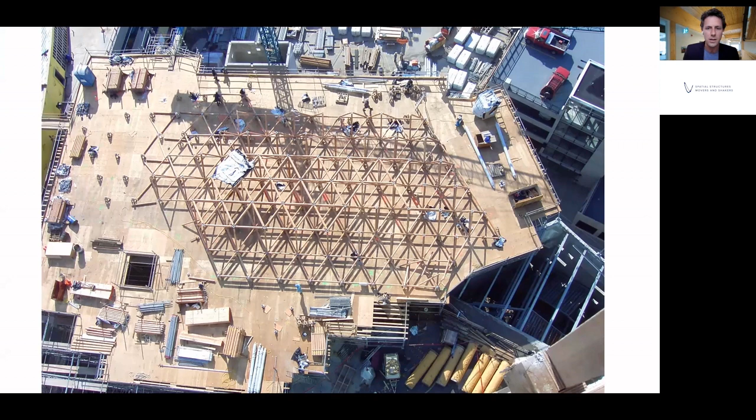And just to give you a window into some of the innovations that Jerry, my father, did, he worked on this really interesting space truss, type of spatial structure. This was one of the first timber spatial structures of its type back in the late 90s, early 2000s. And this is a highly innovative structure, kind of a free form in plan, but a flat spatial truss structure, tetrahedral truss structure, which uses what we call peeler cores.

Peeler cores is what's left after you take a big log and you peel it down into veneers, which are used to make plywood and LVL and the like. And once you get to the very center of the log, which is the young juvenile part of the log, that's typically a very weak, unpredictable material, and it's either turned into fence posts or landfill material.

And this really interesting spatial structure was based on the concept of using those peeler cores as structural elements, and actually doing a full series of structural testing on the peeler cores to determine their capacities and be able to use them, even though they're a highly unpredictable material.

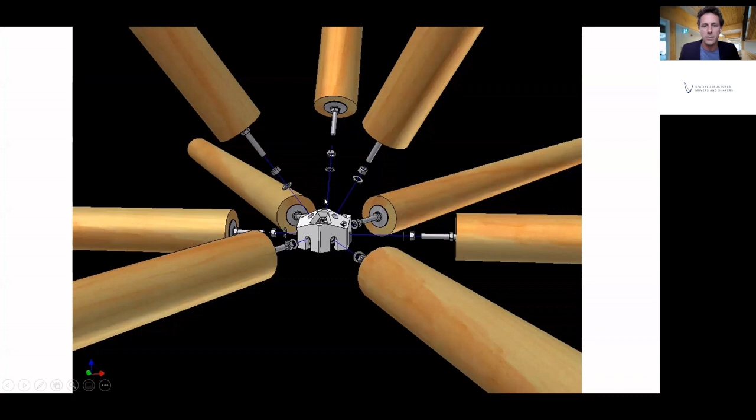And connection concepts, how do you take all these peeler cores in a tetrahedral space truss and actually join them together? So here's the concept of the central casting, which allows each of them to be connected in to transfer both tension and compression forces through the elements. So from a very early age, I was exposed to this concept that you could build, and you had to figure out how to build the structures you were engineering.

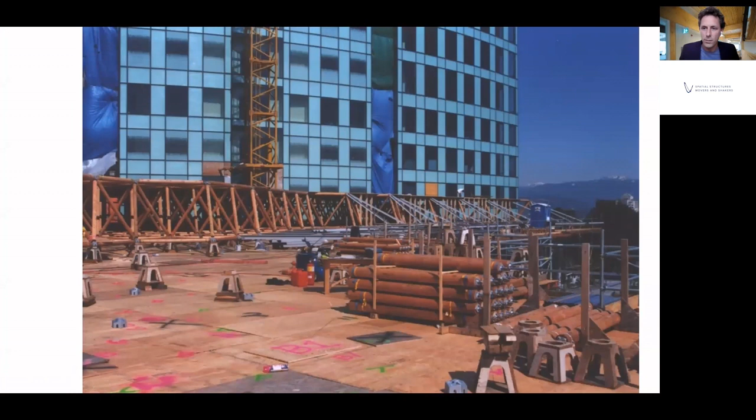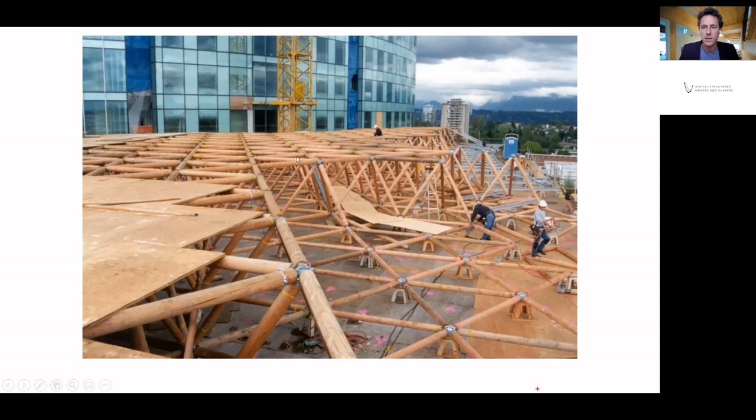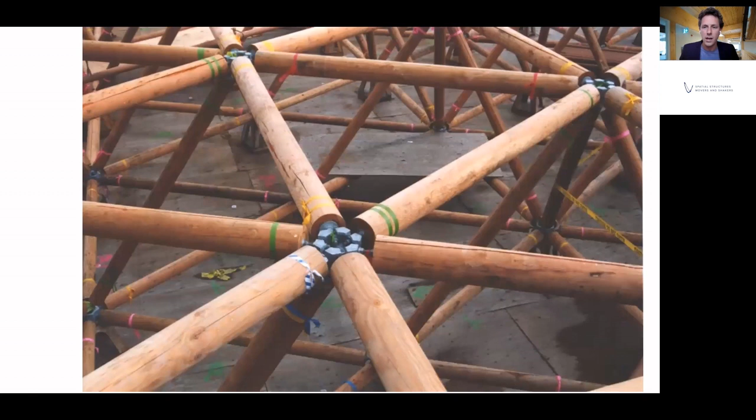Here's some of the shots during construction on the site. And you can kind of see the yellow and green and red tags on the peeler cores, and that's indicating their load capacity after an extensive testing regime at the University of British Columbia, with Professor Ricardo Foschi. And so really interesting concepts of how do you advance timber engineering to use a material which would otherwise be close to a waste product in kind of a spatial structure form.

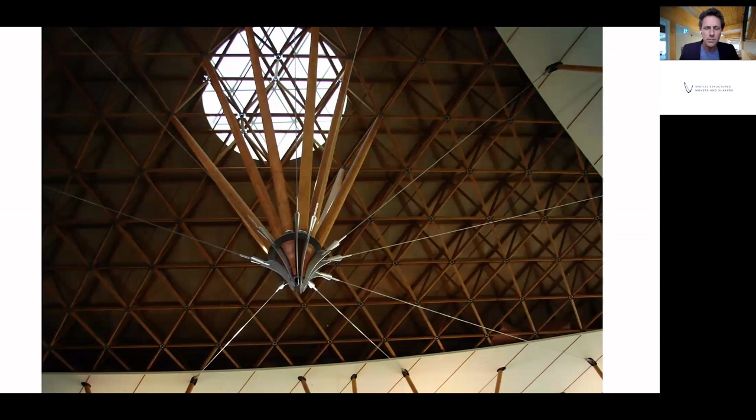So that really inspired me as an engineer. This was before I had even studied engineering. I was involved in some of the 3D modeling and drafting and this type of thing. But this idea that timber could be used to create long span structures really inspired me.

After graduating, I then actually moved to the UK and worked for Buro Happold in London there, and was involved in a whole series of projects, working closely with Mike Cook, who I believe is also on this interview series. He was one of my mentors and really an amazing guy to learn from, just a wealth of experience and a fascinating viewpoint on how to create innovative structures, which are holistically innovative, not just structurally innovative.

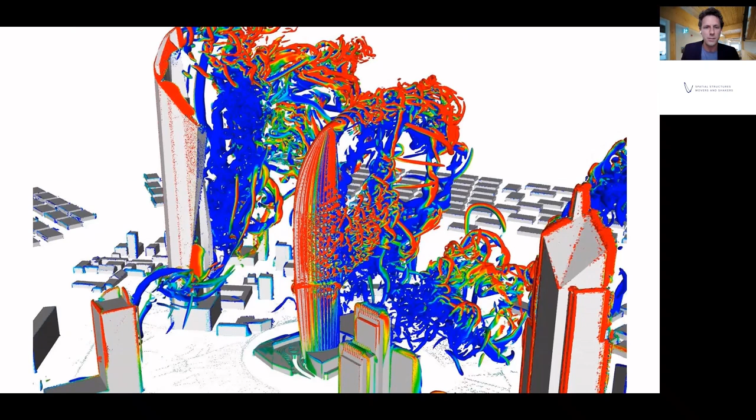I worked on a tower in Kuwait. This is kind of a 300-meter tower with Foster and Partners. Not really a spatial structure per se, but really interesting. This was one of the first times doing CFD simulation back in 2009, 2010 on these tall buildings, all concrete and steel. Not a drop of timber in sight in this structure.

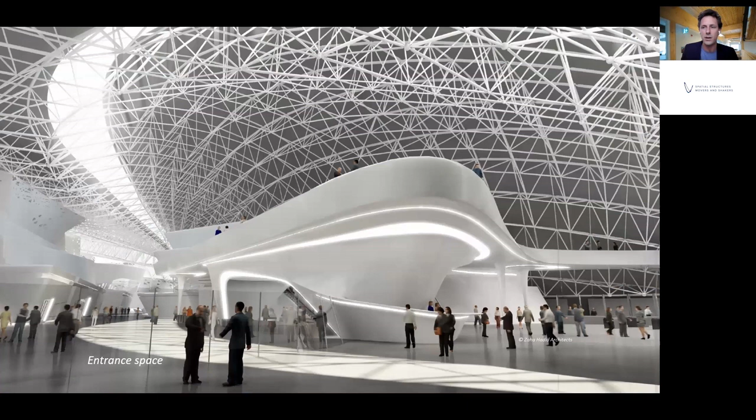And then I moved on to spend a few years on a giant spatial structure in Egypt with Zaha Hadid, which is a steel space truss, the MERO type space truss with all the nodes. And really interesting project, but of course with the political situation in Egypt back in 2010 to 2011, this project went on pause and never actually got built. So I spent a lot of my time working on steel and concrete structures while I was in London.

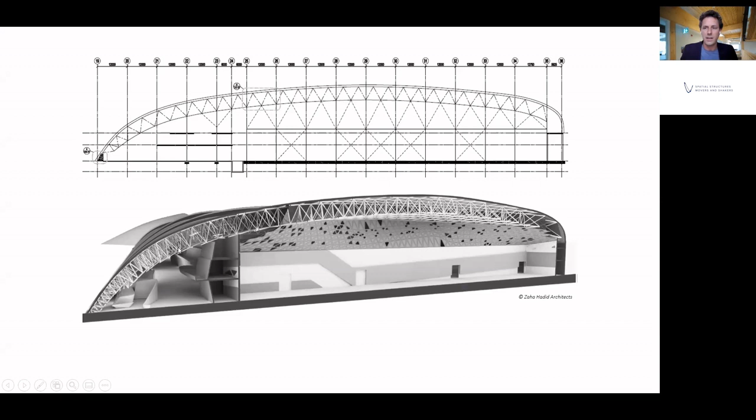And this one, the spatial structure in Egypt, the fact that it never got built irked me. And I as a person really realized I had this longing to actually figure out how do we build, and let's make sure we build what we're ideating.

This is another structure I had the opportunity to be part of in the UK while I was there, the Olympic Stadium in London. And I wasn't part of the engineering team for the overall stadium, but simply just for some much simpler cable nets that went across the stadium for the opening ceremonies, which was a fascinating thing to be a part of, almost designing a secondary structure connected to this highly dynamic structure that you're imposing a whole bunch of loads on, and figuring out how to fly the Olympic rings along these cables to the center of this kind of tensile net of cables.

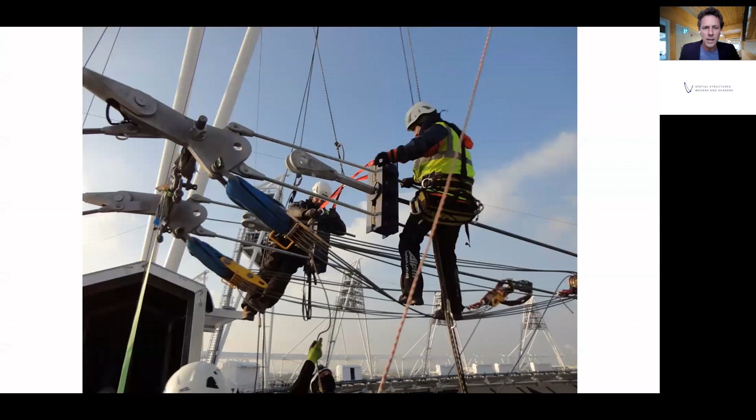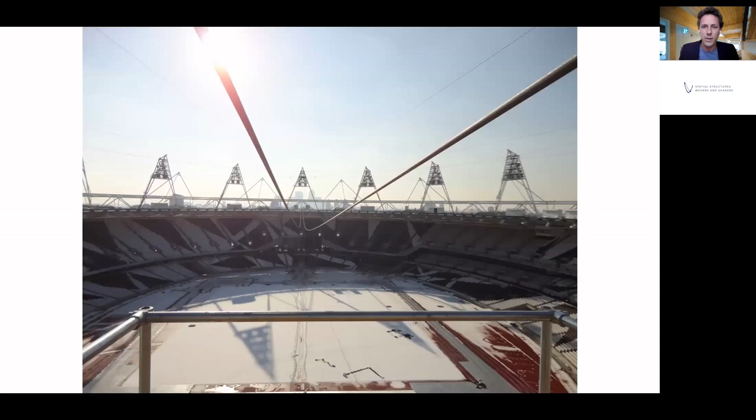And so this was, for me, one of my highlights working in London, because we actually got to build it and we got to figure out and be out there on site as we figured out how are we tensioning the cable nets, how are we attaching things together, how do we make these connections work. So a real neat thing to be a part of, and figuring out how to put it together, and then being a part of the ceremonies there in London.

So back to this concept of master builder. So I kind of started my career in this master builder idea, with working with my father and seeing things actually built. And I moved into a consulting role in both the UK and then in New Zealand. And it really interested me to see how our industry has kind of specialized, and we've diversified, and we've segregated as an industry. And so now we have a lot of specialists who know a lot about some things, very specific things, but very few generalists who know enough about everything.

And so this idea of the master builder, Eiffel and Brunel and many of those who created their own concepts, they figured out how to build it, they found the money, they acted as their own contractor and their own architect and their own engineer, through to the segregation of trades we saw through the Industrial Revolution, to today, where we have this bifurcation between engineer and architect, and not always, but sometimes.

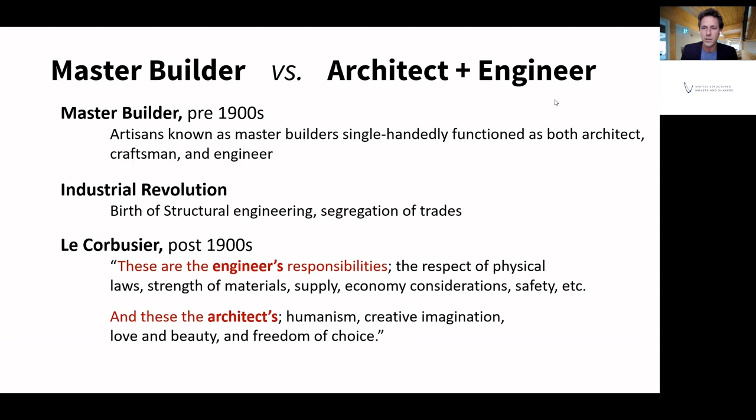And so where I get really excited is where engineers and architects are working together as a seamless team of designers, figuring out how to create beautiful, efficient, and sustainable structures. So I'm going to take you through a few projects to show some of our thinking around this.

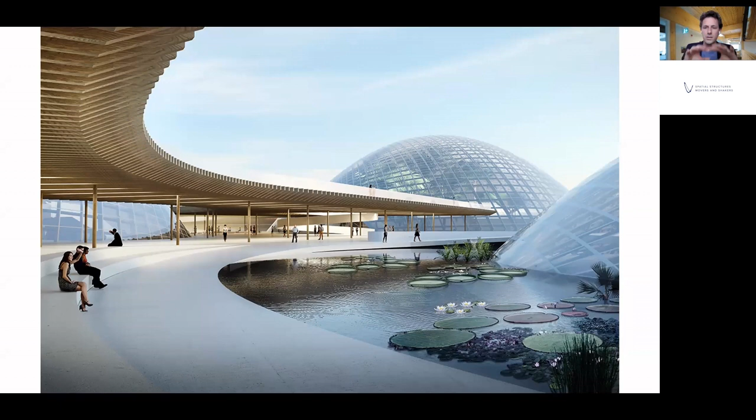This is the series of dome grid shells I mentioned in China, with the Delugan Meissl Associated Architects out of Vienna. And they had a concept for creating these timber shells. These are biodomes in China, in Taiyuan, and 3 different environments inside the biodomes: aquatic dome, a desert dome, and they're creating these different climates for the flora that's exhibited inside.

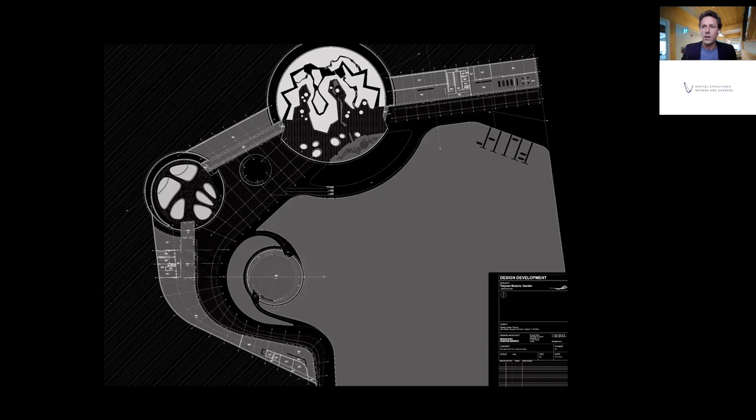And so a real challenge to figure out not only how do you build with timber in China, a country which is so prevalent around concrete and around steel, but how do we bring timber into China, but then also how do we actually build it accurately? How do we manage the construction of a complex timber shell overseas in a country where there is no expertise building such structures?

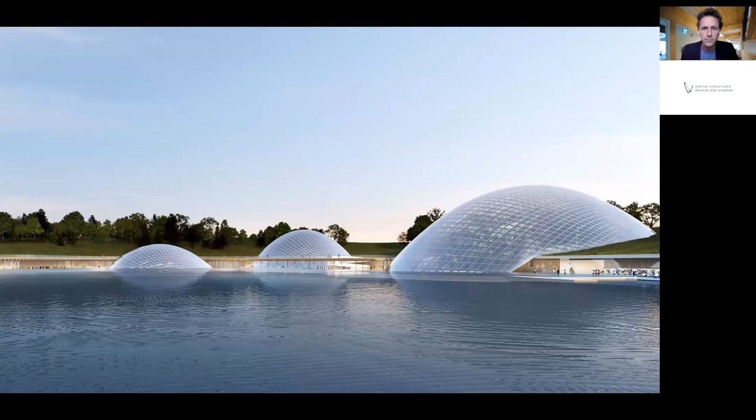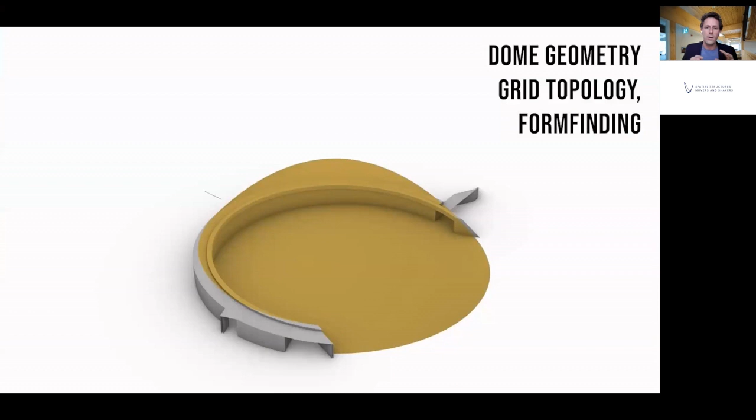So the geometrical inspiration for this shell came from the idea of a clamshell, and this idea of a dense pattern at the back of the shells and a sparse pattern at the middle. And so I'll show you a little bit of some of the geometry studies that we did early on with the architect as we were coming up with the structural concept for how we actually create this kind of radial grid of glulam elements.

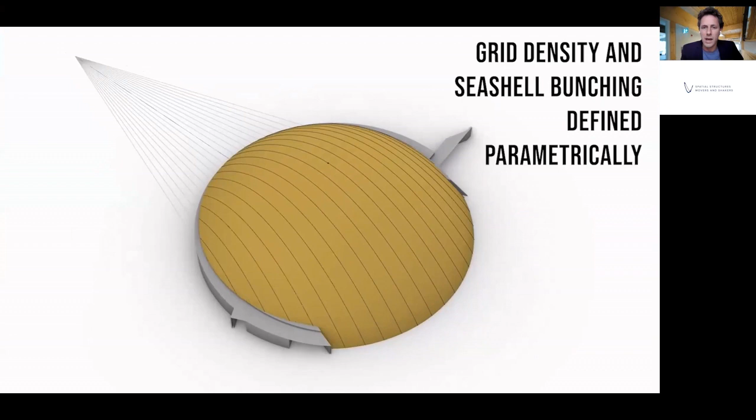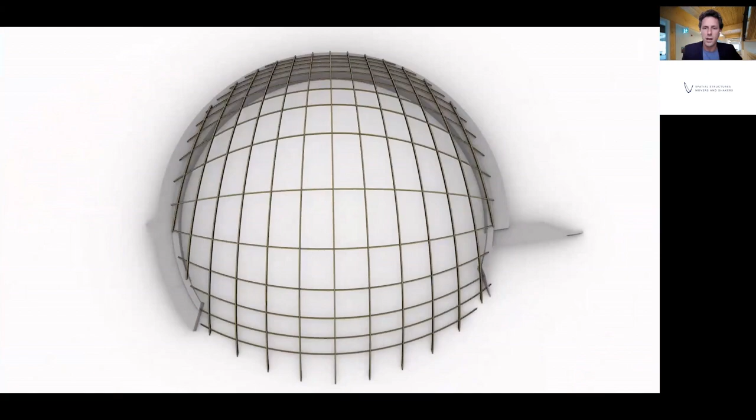And one of the big challenges we had was not only the structural challenge of how dense this pattern of this grid shell should be, but also a manufacturing challenge. How could we ensure that we could get glulam sufficiently accurately fabricated from Europe over to China and fit it all inside a shipping container? And so that actually drove, funnily enough, a lot of the process of the size of the elements, and also the density of the shell, along with kind of some constraints around the glass on top of the shell.

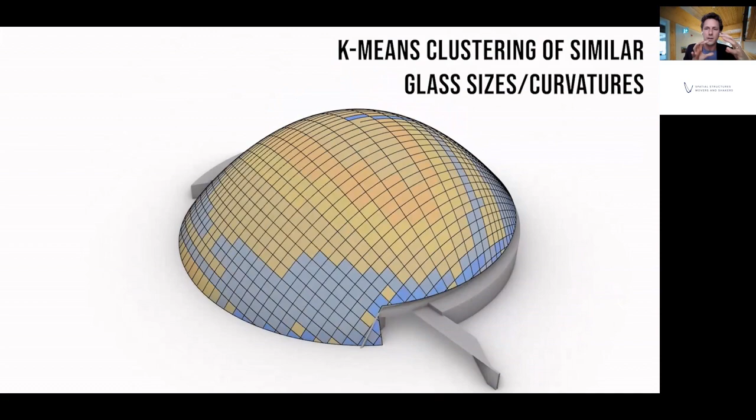And so this idea of using parametric modeling to be able to study not only the timber structure, but also the glass on top, and how do we optimize the glass so we have a minimal amount of doubly curved glazing, although a significant proportion of it still had to be doubly curved from a glass perspective.

And then down to the materiality concept. This is a single block glued piece of glulam, which is actually CNC'd into double curvature. And the reason we did that instead of actually pressing it into a doubly curved element is just because the capacity of the manufacturing isn't there to manufacture significant volumes of doubly curved elements.

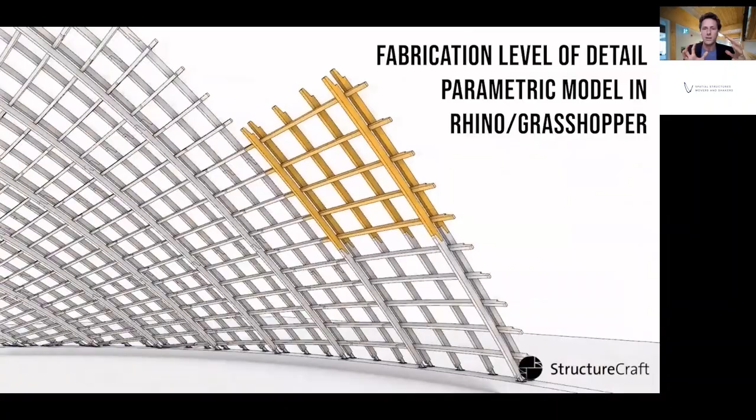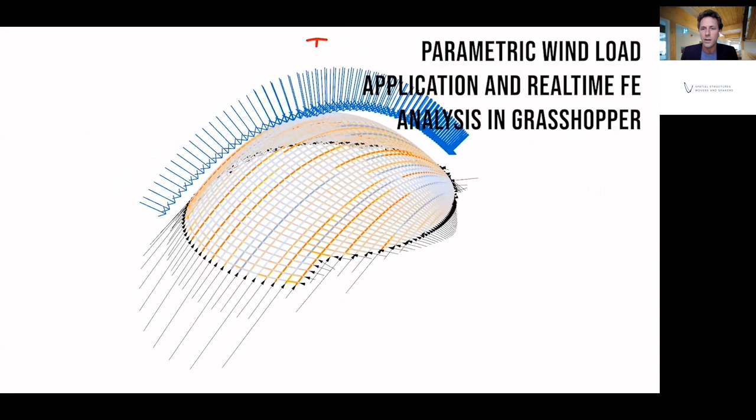And here you see the concept of these doubly curved glulam pieces prefabricated into panels and then flown into place on the structure. These 3 shells, the largest of them has a clear span of about 90 meters. And so to engineer these and to optimize these requires a lot of thinking, not only from an analysis side, but also from the parametric side.

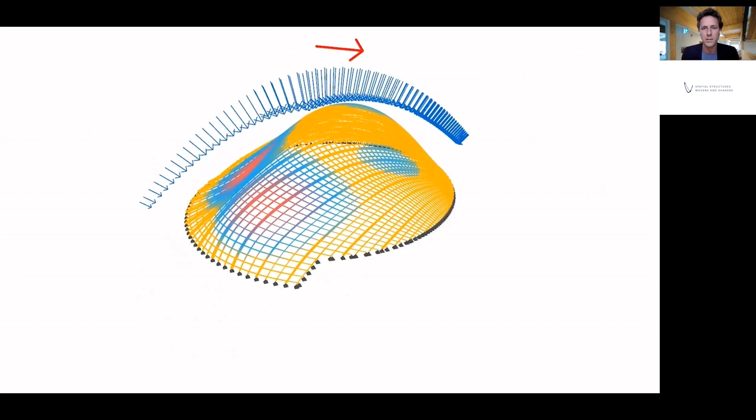And so here's some of our computational models where we're looking at the performance of these shells as the direction of the wind load varies. One of the big challenges was the buckling performance.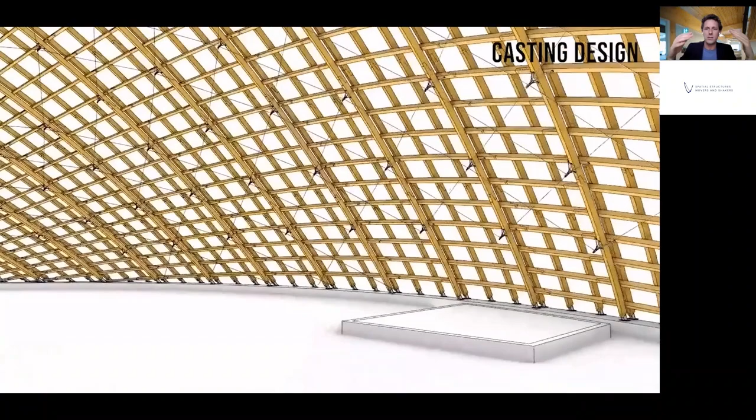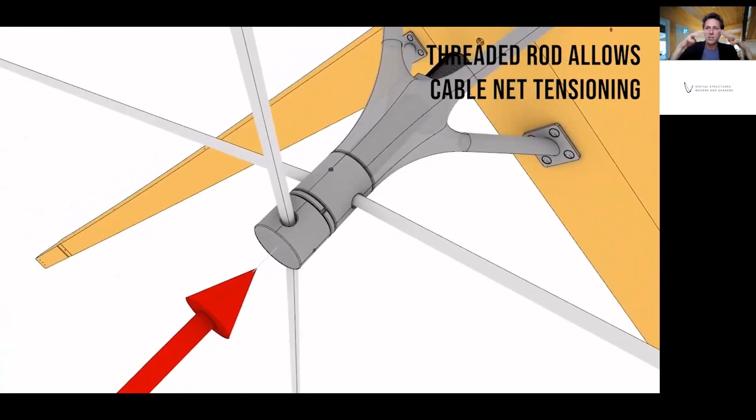And this casting actually rotationally decouples the cables from the directionality of the timber above. And so these rotationally decoupled cables are anchored onto these castings, which are then threaded onto a giant central rod, which goes right the way through the casting and actually allows us to tension the whole cable net by simply drawing the threaded rods closer to the timber shell above.

And so here you see one of the initial prototypes of working at a material scale with stainless steel, of creating this casting and then actually structurally testing to failure this casting. Here you see it in situ underneath the shell.

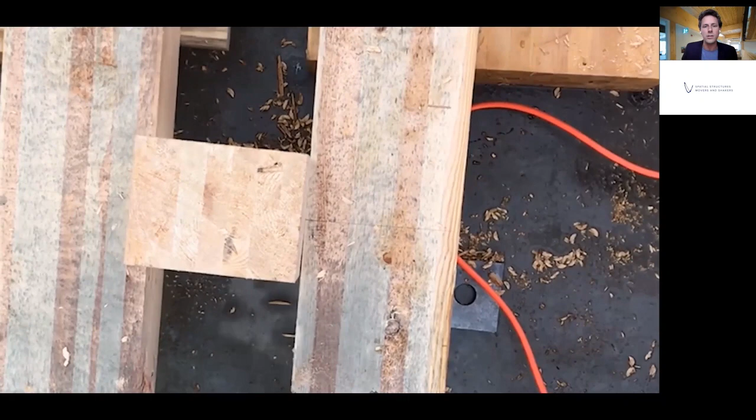And that cable net actually created another interesting challenge of how do we create shear stiffness between the layers. This is a 3-layer timber grid shell. So this is at our facility here outside of Vancouver, doing full-scale structural testing with load cells to see what's the strength and stiffness of these connections between the 3 layers of these timber grid shells.

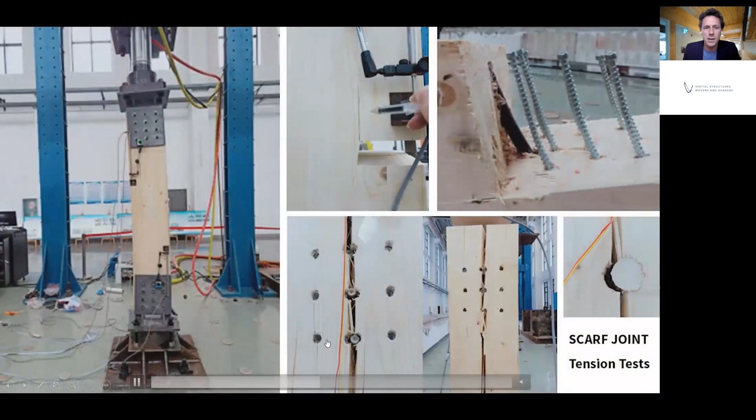And so obviously those shells will never get loaded to failure. We actually care about the initial secant stiffness of these types of tests. So lots of structural testing to prove out our concepts and create timber connections, which hadn't really been done before.

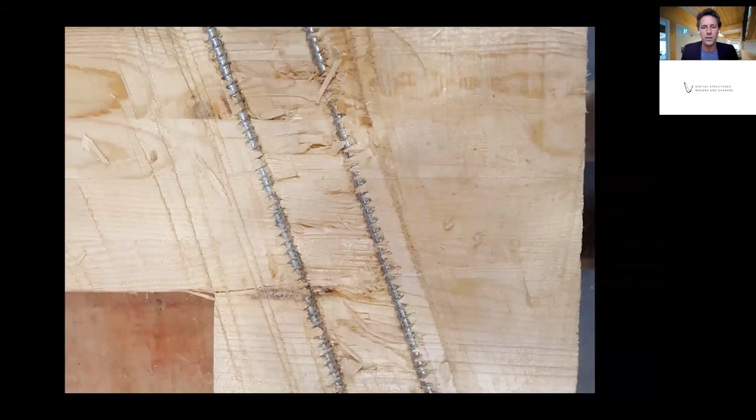Even moisture testing. We're using screws in a highly humid environment. So we've got to figure out how these screws are going to perform after the wood's been exposed to very high moisture contents for a long period of time. And so we're doing that moisture testing inside our facility.

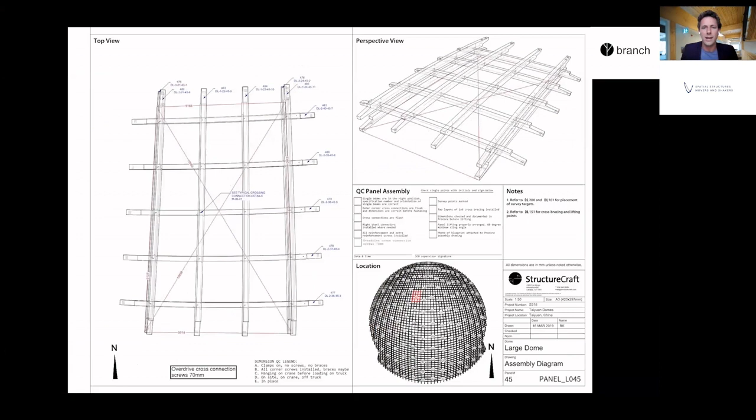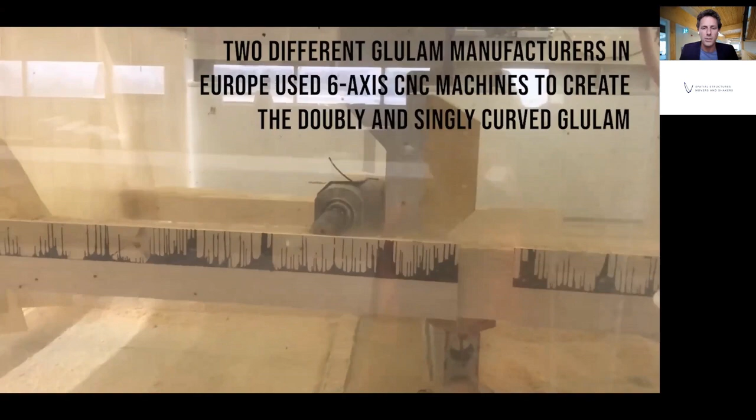And here you see the shop drawings. This is, again, all using Rhino. And so we're actually creating all the automated shop drawings for each piece straight from Rhino and sending the CNC files straight to the manufacturers, in this case in Europe. So 2 different manufacturers worked on the CNC processing for the glulams, one in Germany, one in Austria.

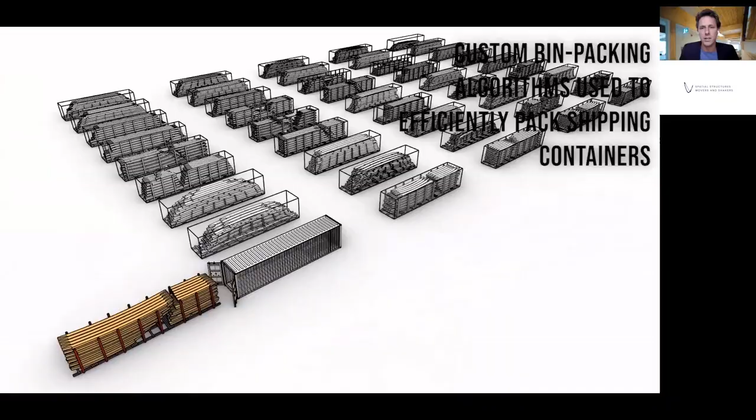And we sent them directions and exact sequencing for each container of material, so they know exactly where each piece goes in the entire project as they're shipping it from Europe on rail or ocean freight through to China.

Now here you see this concept of the prefabricated unit coming together, and this little animation gives you an idea of we're doing prefabricated units, but we're leaving strips in between them to allow for tolerance. This is critical because nothing's ever perfect on a job site.

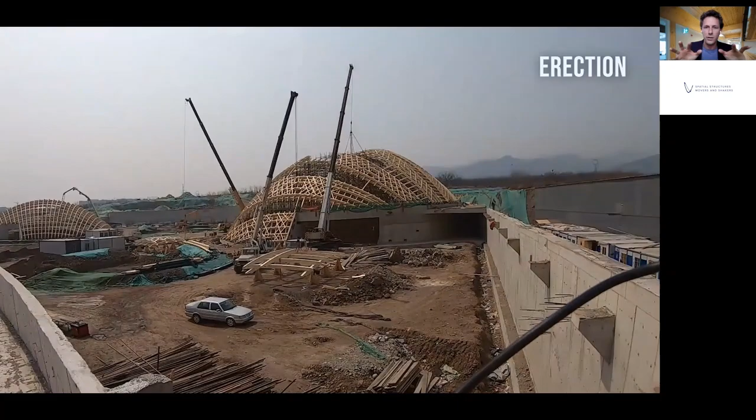And so you have these prefabricated units which are perfect, but then you have inevitably some dimensional bust between these strips of prefabricated panels. And so we left these infill strips to allow us to join those back together later and make any dimensional adjustments if required.

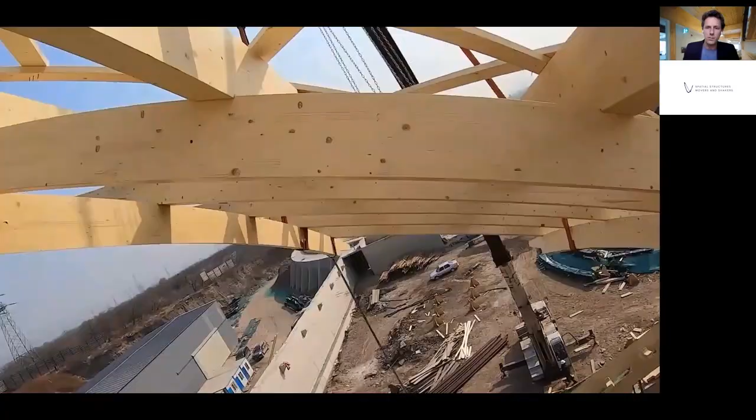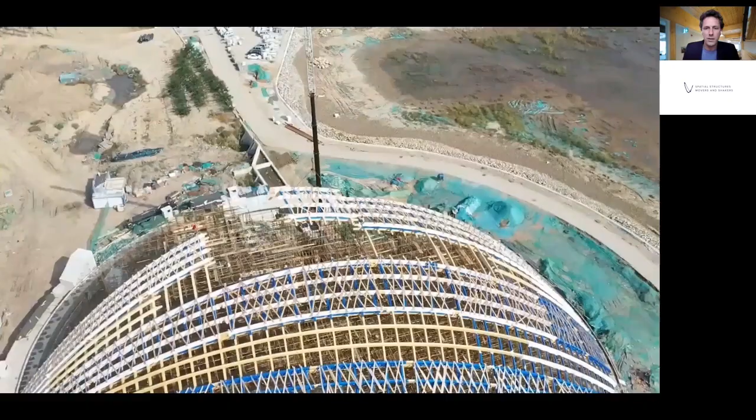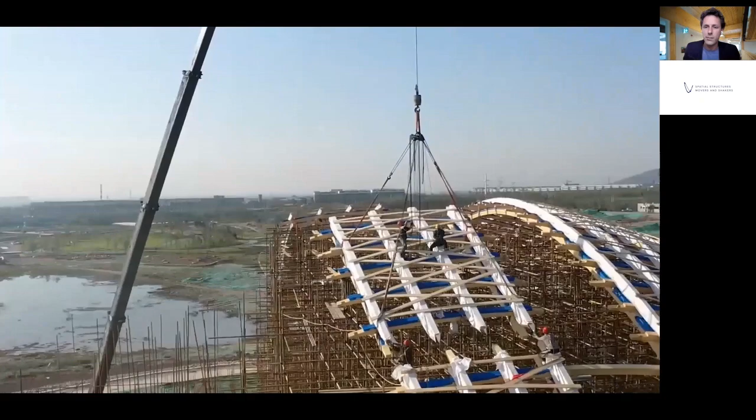So here you see prefabricating a panel, flying into place up on the shell, and you can see the scale of these structures, almost a 300-foot clear span on the largest of these grid shells. So really interesting exploration, not only from a structural standpoint, but also from a materiality and an erection and assembly standpoint, which ended up creating one of the largest non-triangulated timber shells, as far as I'm aware, worldwide, for the largest dome.

Here you see some of the shots inside this dome. And so a really unique visual aesthetic. We see so many of these steel grid shells worldwide. This is one of the most recent modern ones to use timber.

We're starting to see it become more of an interest from an architectural standpoint to use timber in places and shells like this, and this symbiosis of the timber shell structure above and the natural flora beneath. It creates a really beautiful environment and something that we were really proud to be a part of.

That was a very large scale structure. Now I'm going to tell a story of a similar approach on a much smaller scale structure. This is actually near Tianfu in China, and this is for an agricultural expo. So locally they're exhibiting what the agricultural industry produces around Tianfu.

And so with this idea of all these trees, they wanted to create an observation tower which overlooks all of the fields surrounding the area. And so we came up with this idea of a forest canopy, this series of randomly leaning columns, a kind of shelter on top, and then a viewing deck at the middle.

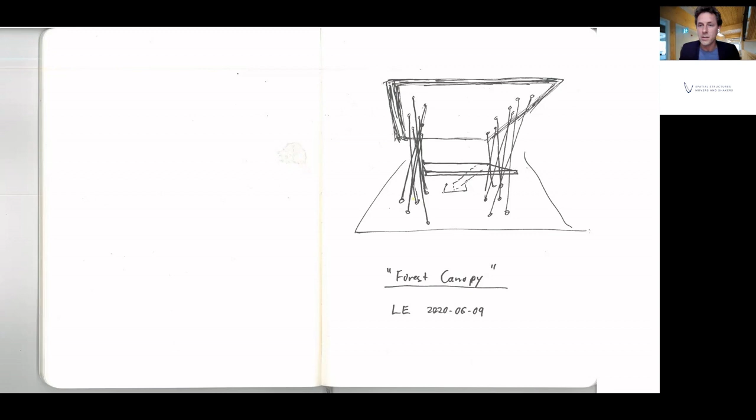And we had a certain amount of wood glulam material that we had to use for this observation tower. It had to be built very fast. I think it was from the concept through to almost being built in something like 3 or 4 months. And so we came up with this concept of using these leaning columns to mimic the non-orthogonality of a forest. And on top is what we call nail laminated timber, this idea of boards stacked side by side, and then we're actually warping the nail laminated timber to lift the canopy towards the opening.

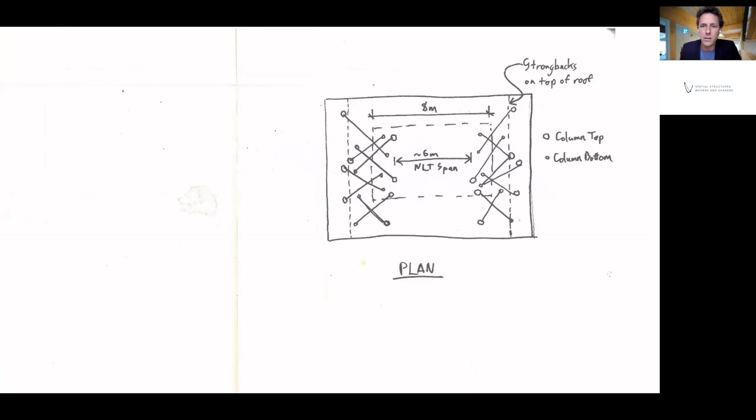And so I'm going to show you this little video. This is a video showing the structural and multi-objective optimization we performed to figure out what geometry these columns should take. We don't want them all to be up and down. And we're using nail laminated timber, which in itself is actually a one-directional structural material. It spans in a single direction. But we're wanting to point support, which is creating weak axis moments in the panel.

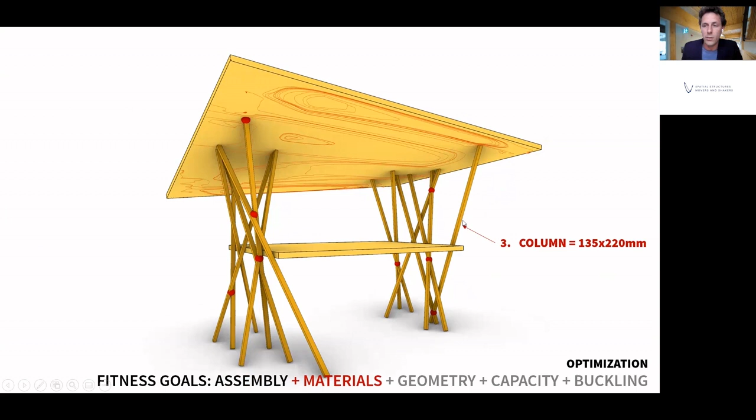So we set in place a whole bunch of really interesting constraints on our optimization algorithm, where the columns obviously can't hit each other, and then the columns are a certain cross section, because this is the material we have available. It's a 135 by 220 mil cross section. Then it can't be longer than a certain length because of the available materials.

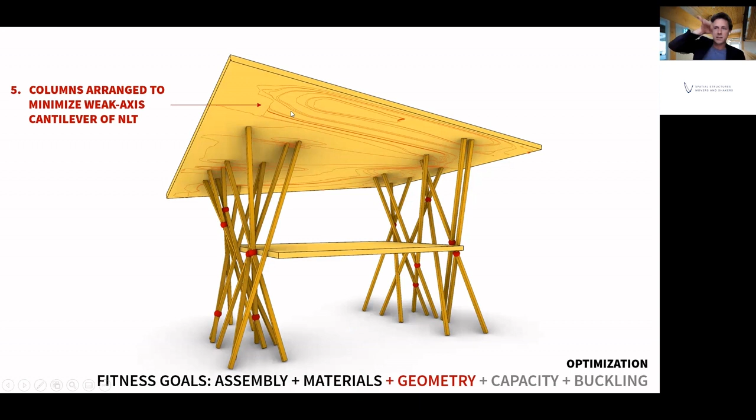Then we also want to minimize the amount of weak axis span. So you can see this is a terrible solution because we're getting a whole bunch of weak axis cantilevering. The panels are spanning left to right on this page. And so we put a constraint on minimizing that weak axis bending. And then we're also saying that the net sum of all these leaning columns must be roughly equal to 0. We don't want a structure that wants to tip over under its own self weight.

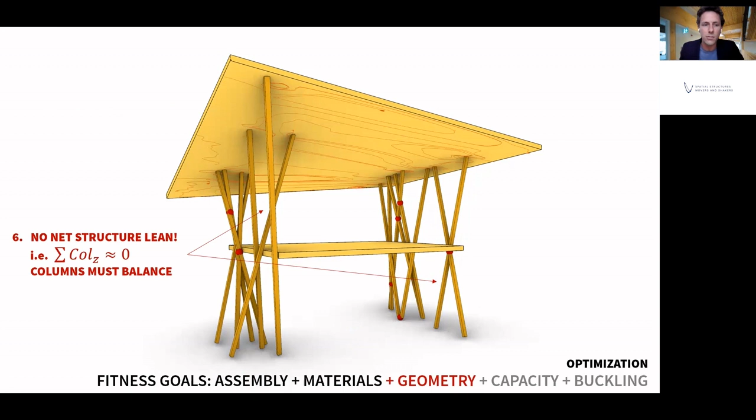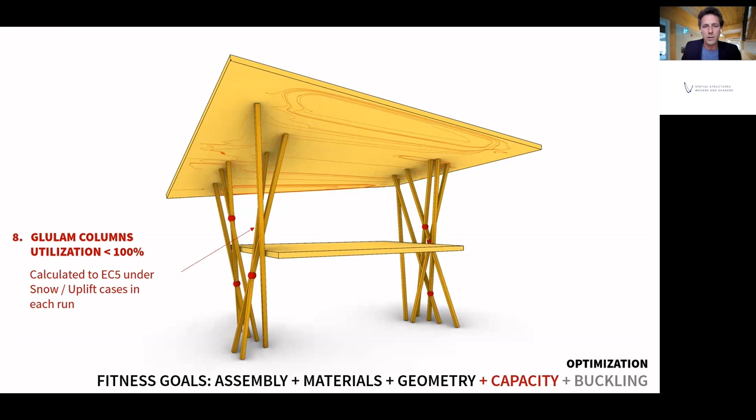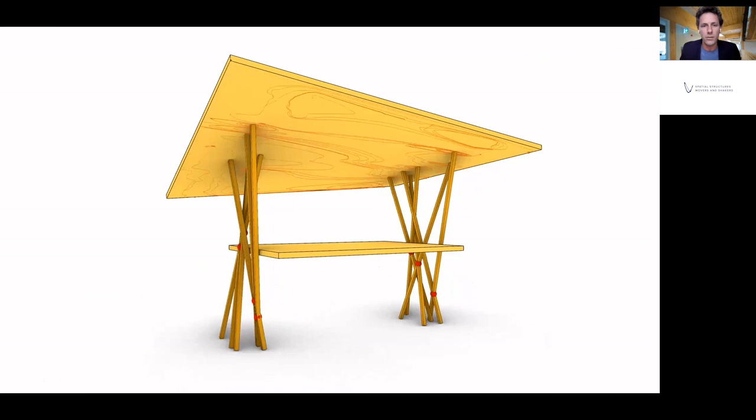And finally, we must be supporting the floor structure in a straight line, so that we have this rectangular viewing platform. So then we're doing section checking to make sure the glulams have enough capacity on each iteration, and then also minimizing the major axis and minor axis bending of the shell, and checking the global buckling. So slowly iterating towards a solution, and this is a slowed down version of the optimization you saw before, where you're investigating hundreds, if not thousands, of solutions, and finally ending up at a solution which globally minimizes all these constraints.

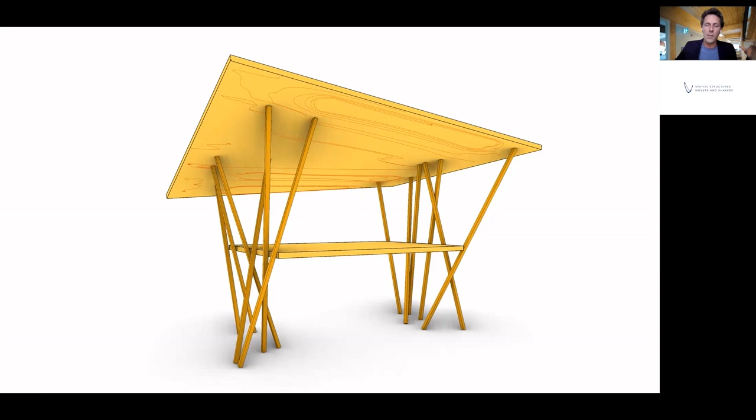And this is a really interesting use of what we call genetic algorithm. That's an ability to look at a multi-objective solution space, which is very, very complex and is very difficult to optimize with traditional optimization techniques. But with a genetic algorithm, because you're able to accommodate this very choppy solution space, you can get to an optimal solution.

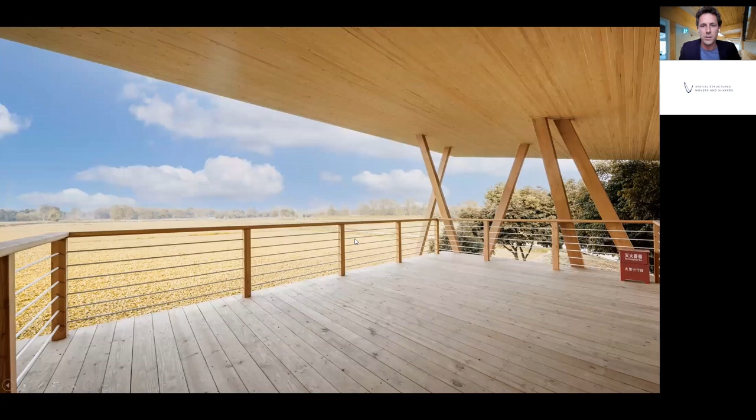And so here you start to see the canopy after it's built, leaning in through the trees, and this idea of these sloping timber columns coming up to this shell, and the sloping of the columns creating these different seating areas and opportunities underneath the tower. And here's the built structure. So a very small scale structure, but an interesting application of optimization techniques, and it really came together nicely.

And right adjacent to this, we're actually doing our next biggest structure in China, which is about 80,000 square meters. It's a series of vaults. It's an exhibition center very close to that tiny little observation tower. But here we're talking about structures on a much larger scale. The largest span is about 115 meters, and the tallest of these vaults is about 45 meters tall. So it's as tall as a 10 or 12 story building.

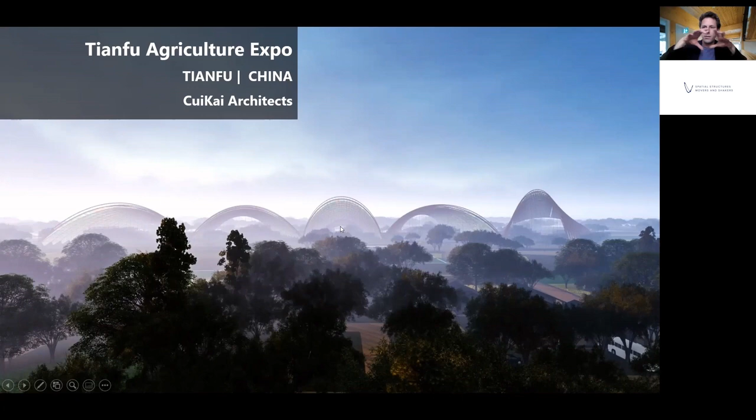So these are giant coverings, and inside these coverings are other buildings, museums and exhibit halls and food halls and the like. And the architect Cui Kai out of Beijing posed us the challenge: could we actually expose the timber to the outdoor elements?

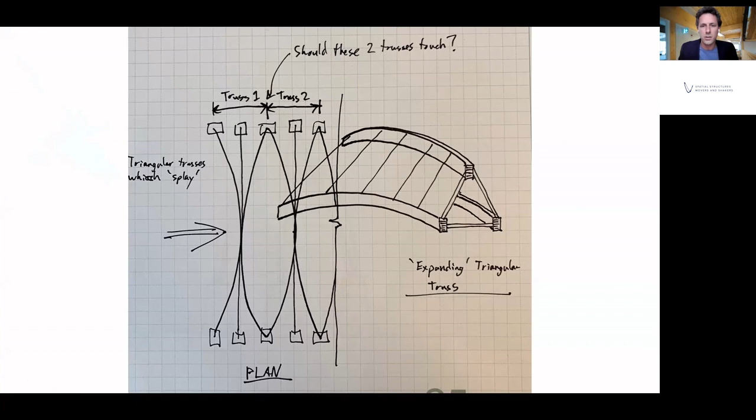Could we leave it exposed and not have to cover it, so that you can see the cladding of the truss structure is actually done on the bottom chords of these triangular trusses, not up on the top. And so our initial structural concept is this idea of a constantly changing triangular cross section, which starts large at the bottom and comes to a narrow point at the top, and creates this ability to resist lateral loads, both in plane and out of plane, for this is a reasonably high seismic zone. And so we're creating this really unique truss structure.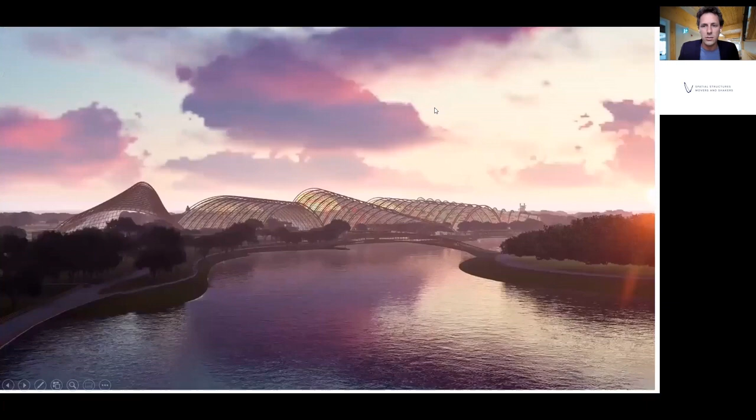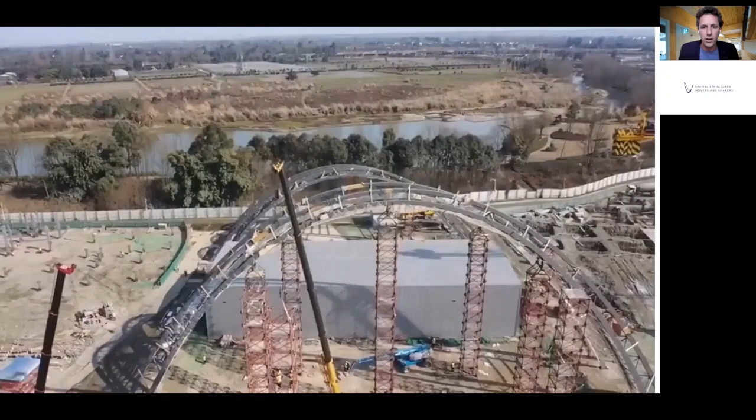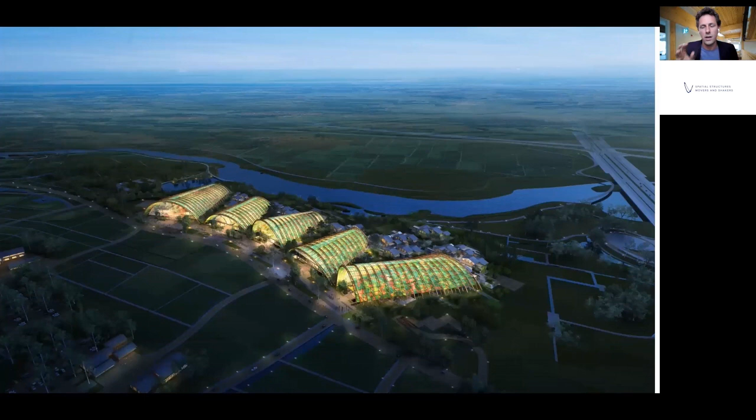And so here you see some of the scale, and this is our 3D model showing the scale of the buildings inside, and then these timber trusses, which basically clear span across the build structures. This is some footage from early on in the construction, where some of these arches are getting placed, and we're using this really interesting structural technique: it's not actually a truss. It looks like a truss, but it's actually a Vierendeel truss.

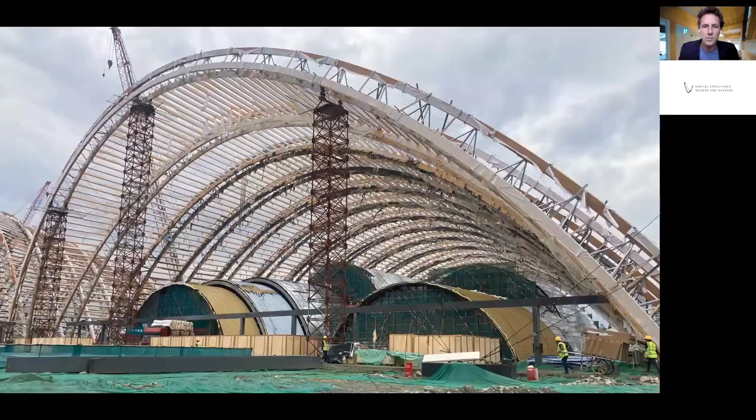And you can see in this picture here, these truss elements don't actually meet each other. In fact, they miss each other by quite an amount. And so this is actually not a traditional truss structure at all. It's actually using moment and shear action in the chords to transfer the forces. And this is responding to the architect's request to almost make the chords of the truss look like they're not even touching. So we're using steel plate elements as thin as possible to connect the top chords and the bottom chords together and create this very elegant, almost disappearing connection between the top and the bottom chords of these

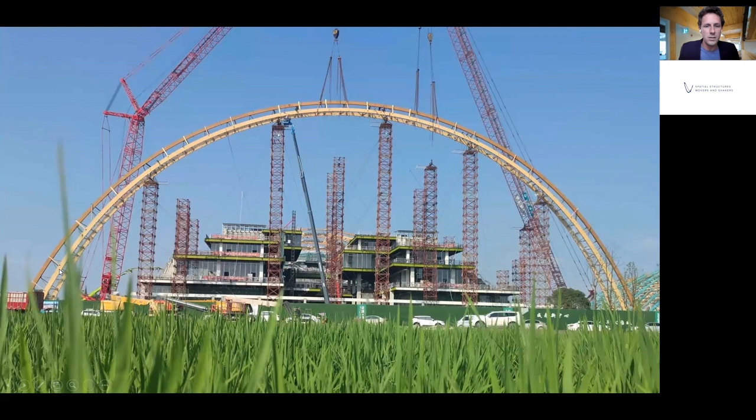giant trusses. This is one of the largest ones on the structure, about 115-meter span. So this is still under construction, as you can see, but you get a feeling for the scale of the structure. And then finally, I just wanted to show a project which is just going to open up in the next few months in Idaho, which is a basketball arena.

And again, in the field of spatial structures, it's all about the concept. We have all these fancy algorithms and fancy tools to do our form finding and form searching, but really what it comes down to is the concept from the architect, the concept from the engineer. What are we going to create? How are we going to create this structure? And this is the initial sketch from Alec, who's the architect on this basketball arena, and he wants to create this beautiful doubly curved shape drawing from the Palouse Hills in Idaho. And so the question is immediately posed: how do we create a roof which simulates that double curvature, that smooth shape shifting that the hills show there in Idaho?

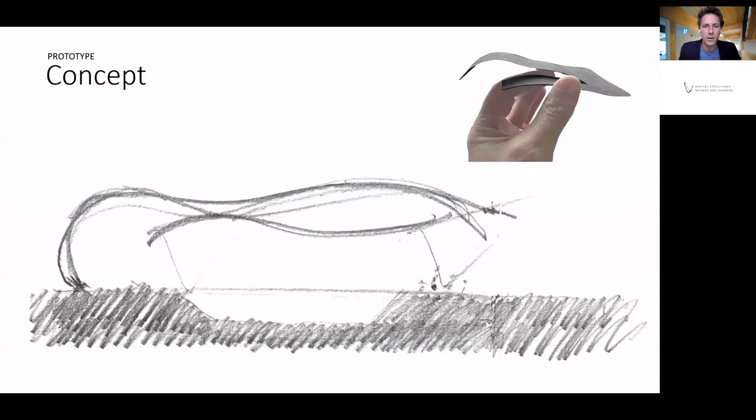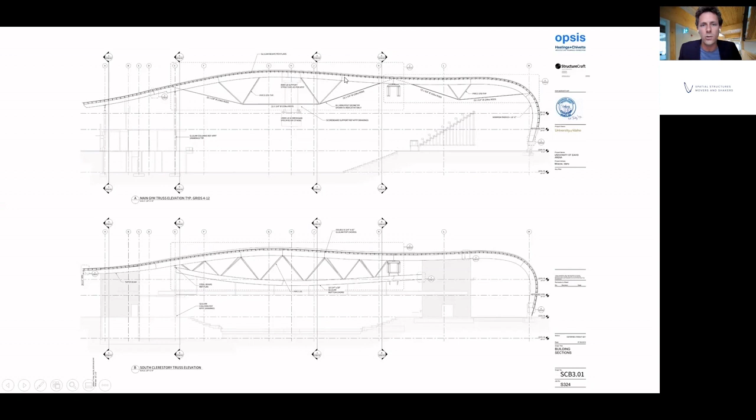And this is the final design as it was come up with. And here we're actually looking at trusses. So we're looking at glulam chords, which follow the swooping, undulating form of the roof, and then steel compression chords, and steel compression webs, and then tension rods as the chords of these trusses. And so then we're looking at optimization as an ability to iterate on the structural shape of the truss to get to a minimum moment solution and reduce the amount of material used in these trusses.

And because the solution space is huge, we can have trusses and king posts at whatever geometry we want. But you can see the difference between an optimal solution and a non-optimal solution is significant. We can save a lot of material. We can design sustainably through use of these optimization techniques. But the optimization techniques are just the tool. You have to have the concept as a designer in the first place.

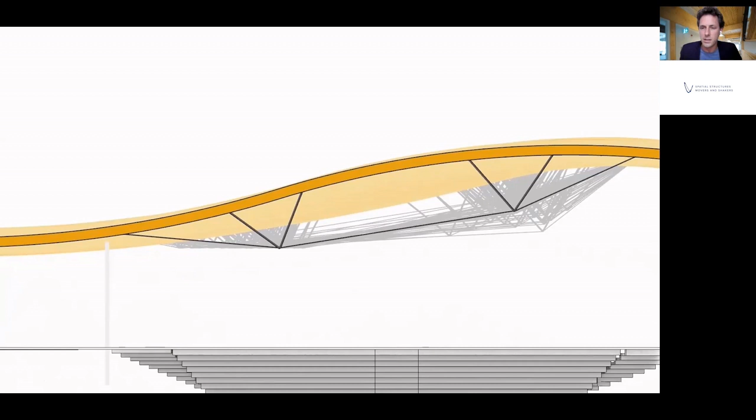For the clear span across this basketball arena, you see here on the right, we also went through a whole bunch of different concepts of how do you clear span about 130 feet. And you've got about 200 feet of tributary area coming onto this truss, which spans 130 feet. And so here's some of the initial concept thinking, again, thinking about the concept first before you go into the optimization. We landed on this propped cantilever concept here, where we're actually able to integrate the services inside the two chords of this giant truss.

So the services for this whole basketball arena are actually concealed inside the structure, so you don't see ducts underneath the structure. Here, this is a detail of this giant portal frame, clear spanning 130 feet. And here we're using this curved column to thrust and create arching action into the beam, which goes across the arena.

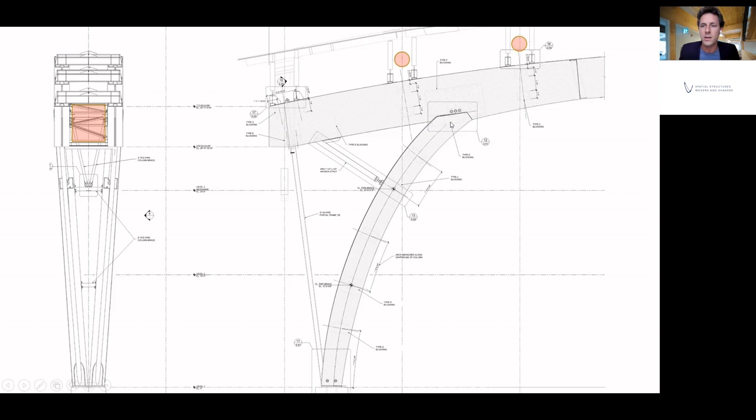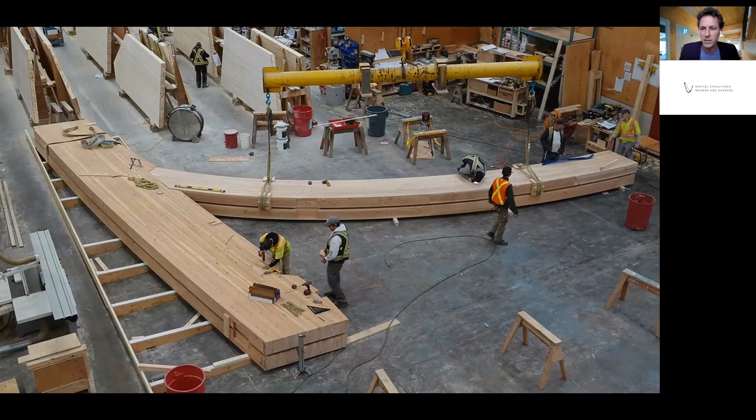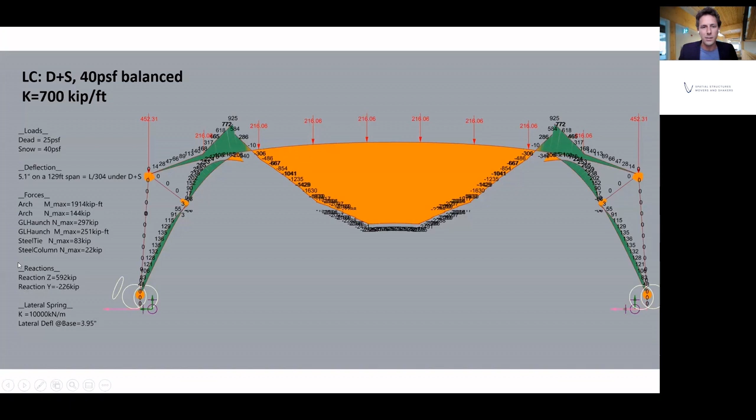And then because we're building it, how do you actually fit these pieces together? So here's our workshop, test fitting the pieces together. And this is highly collaborative, where so many people, architects, engineers, designers, carpenters, master craftsmen are coming together to figure out how do we build these, how do we accurately mill them and test fit them. And interestingly, because we're using arching action, the stiffness of our footings really matters. And so the stiffer the footing is, the more arching action we can get.

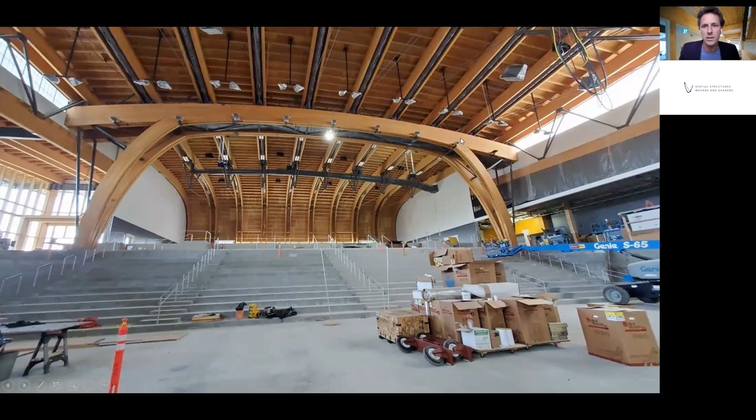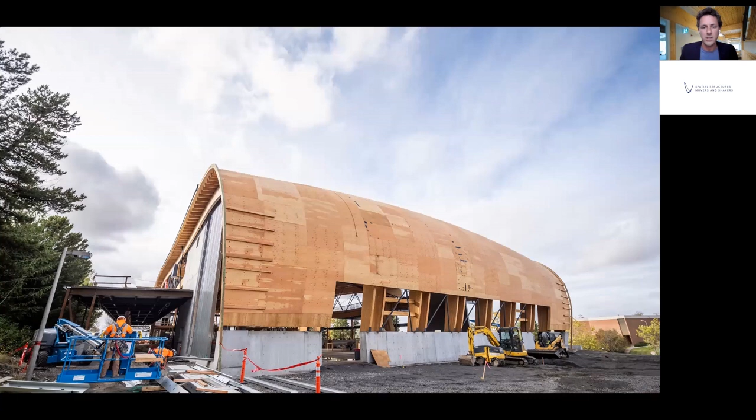So it doesn't always make sense to use wood. I mean, our company focuses on using timber as a sustainable and renewable material, but sometimes it makes sense to hybridize, to use steel as well. And so that's something that we are focused on, is using the right material in the right setting.